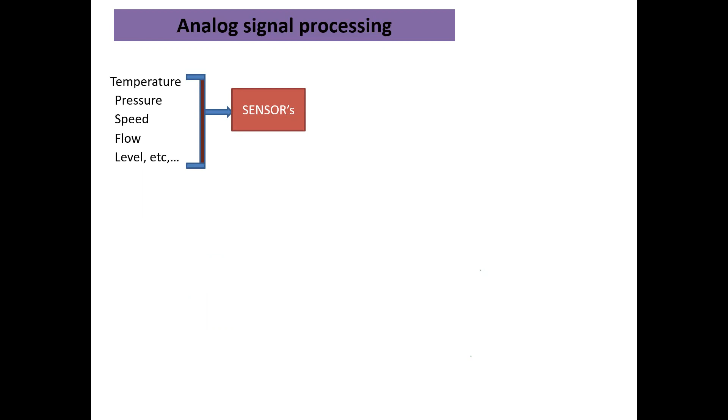So these parameters are measured in terms of non-electrical values. Okay, these are our non-electrical data, but our PLC requires electrical signal. So to convert this non-electrical to electrical, that we are doing using a transmitter or a transducer. Okay, which is giving you any one of the output here. Okay, two formats are available: voltage or current. Okay, but anyone you can use here, voltage or current.

So voltage is for shorter distances, whereas current can be used for longer distances. Okay, because there will be a voltage drop after few meters. Okay, like up to 30 to 40 meters, you can use a voltage signal, right? So after that, there will be a voltage drop. Okay, so to avoid that, we are using current signals for more distances.

Here you can see we are having some analog module. Okay, this is for the S7 300 controller. In that we are having this analog module, and in this module we are having some pins like 1 to 20. Here for your one signal, okay, for one channel you are having two wires. Okay, one is plus and minus. So like that we are having channel 0, channel 1, 2, 3, like this up to 7. Total 8 inputs, analog inputs you can connect in one module. Okay, in 300 system.

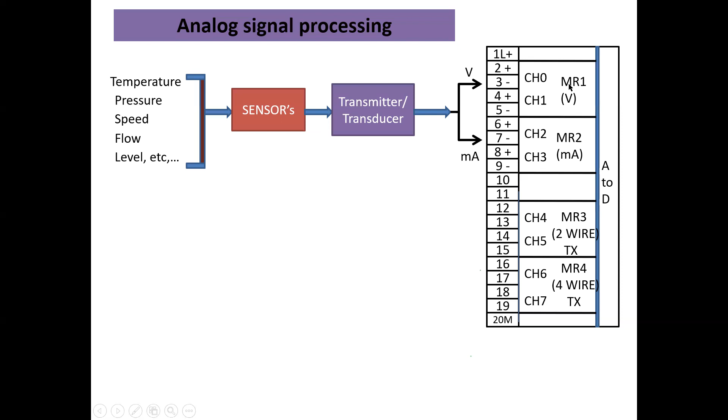Then you can see there is MR1. Okay, MR stands for measuring range. Here it is like selecting your type of signal, if you are using voltage signal or current signal. Okay, so this one MR is using two channels.

Okay, so one channel means one word, that is your one analog input, means it is storing some value. Okay, in your analog channel we are getting some value. So value means one word which is having 16 bits. For 16 bits, if you convert into integer number, you get some value. Okay, that is 240, 241, 243 in that format. That is one analog input. So one MR uses two channels, that is two analog inputs.

So this MR is like one jumper. Okay, this is actually one jumper here. At the side of the module, you will see there are some coding A, B, C, D. Okay, on this jumper, you can remove this jumper and you can connect. If you are selecting A, we are having this type of signals like RTD, thermocouple, or direct from thermocouple like 80 or 100 or 1000 millivolts, like that signals you can connect to the module.

If you are selecting B as a code, then that is ranging between minus 10 volts to plus 10 volts. If it is C, it's a 4-wire transmitter. D, 2-wire transmitter. The 2-wire transmitter means it is having only two wires, okay, which is connected to your channel, okay, plus and minus. So this transmitter is taking supply from your analog input module itself, and signal is also passing through the same two wires, okay, for shorter distances.

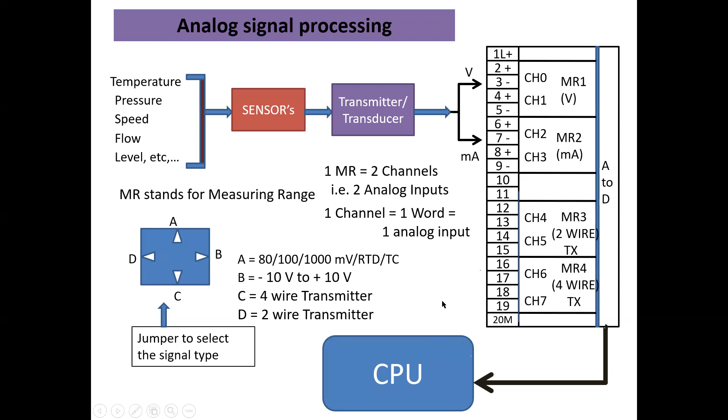So this is for 300. Nowadays for 1200 we are not getting this one. It is an input and output address format. For 300, PIW stands for peripheral input word, PQW for peripheral output word. So in our 1200 and in this TIA Portal, we are using IW as a format only. IW means input word. We are not using P here. Even for 400 series or 1500 series, we are using only IW as an input format for address.

And then we have to give a byte number. Here you can see 256 and 257. So 2 bytes means one word, right? So it is a word address for your analog inputs and outputs. So IW for inputs, QW for outputs.

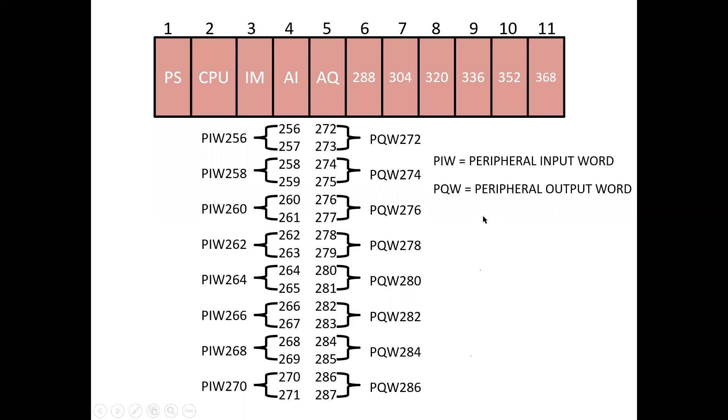So here, for example, if we are measuring 0 to 100 degrees centigrade, some temperature, that we need to convert. It is in degrees centigrade, right? So that we need to convert into electrical format. So this will be 0 to 10 volts. But your signal will not be exactly 10 volts. It might exceed also, right? There will be some fluctuation. Due to that, it can reach up to like 11.75 volts.

Similarly, current will not be exactly 4 to 20 milliamps. It might exceed also. It might go up to like 22 milliamps. So there's like an error, meaning exceeding the limit. So this is converted to 0 to 27648 in Siemens. For 0 to 10 volts or 4 to 20 milliamps, we are taking only 0 to 27648. The remaining range is called tolerance.

So they are using this remaining value for tolerance. 32767 is the maximum value. That's for tolerance, meaning how much it can bear at maximum. So that's why Siemens is taking only up to 27648 here. So this value we are getting in our input channel.

Input channel means IW, whatever the byte number it shows, like 80, 64. So on that channel we are getting this value, meaning this 0 to 100 degrees centigrade is converted to 0 to 27648, which is coming on your channel. But the actual value we are measuring is 0 to 100. That means we have to again convert this 0 to 27648 to 0 to 100. That is our engineering units.

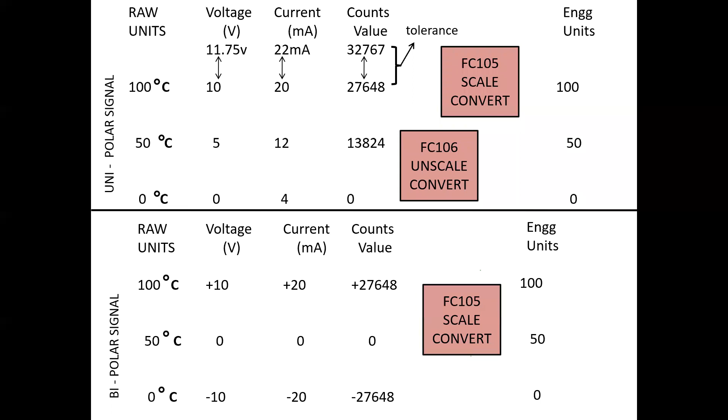So this is about scaling, what we are doing in scaling. For unscaling we use FC 106 in 300, called unscale convert. But in 1200 we have a single block which you can use for both scaling and unscaling. For that they use a separate concept in 1200 called normalize. One more block is provided called normalize, and using that block we convert the value. We will see the example.

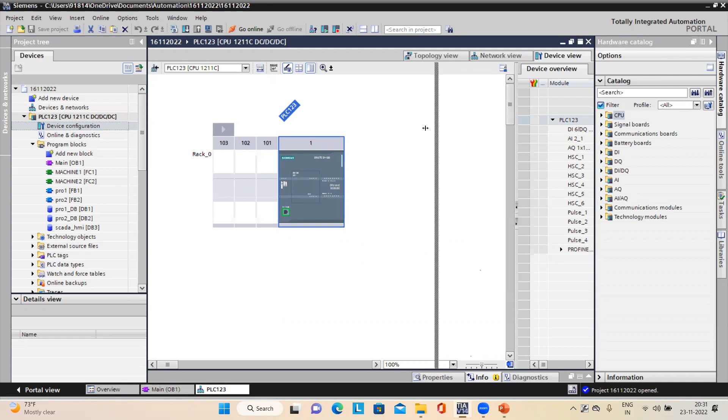Here in the program, if I go to the device configuration, there is your hardware configuration. Here you can see in your CPU you have two analog inputs, AI2. It is showing the analog input address starting from 64 onwards. 64 up to 67: 64, 65, 66, 67. These are the byte numbers. It has two analog inputs, meaning two channels only, and one channel means one word. So the word addresses are IW64 and IW66. Similarly, we have analog output.

If you want to see, you can check in the properties for the analog module. Select the CPU, go to general properties. Here you can see AI2 analog inputs, and you can select the range here. Go down: there are two channels, channel 0 and channel 1. For these, the voltage range is already fixed at 0 to 10 volts only, for the second channel also. For analog outputs, you can see them here, and whatever output you want, voltage or current, you can select here.

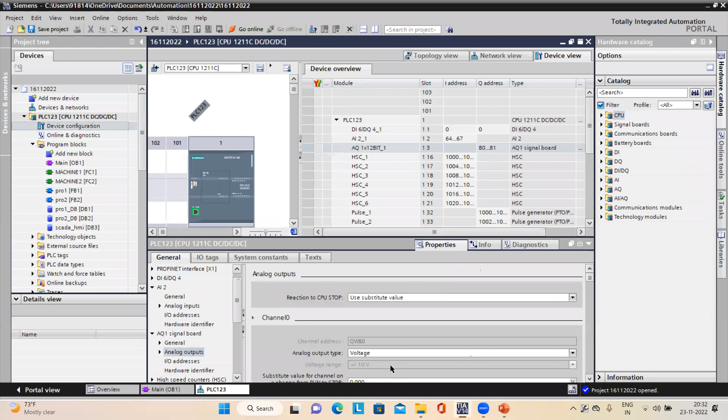For current we'll get 0 to 20 milliamps as the output, and for voltage we'll get -10 to +10 volts, that you can get here. The signal is already fixed here with this compact module. Now I save this for programming.

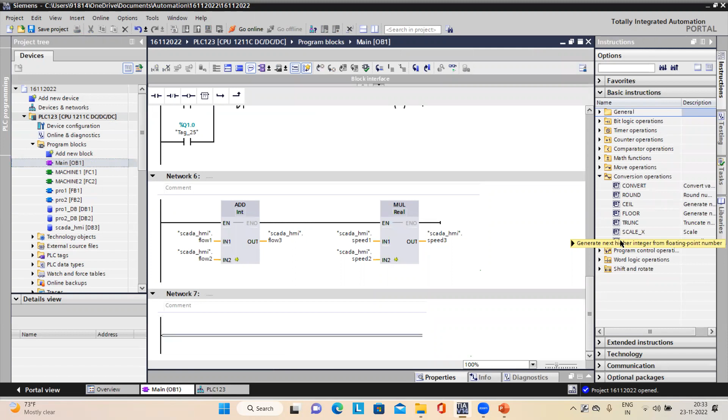Here, first of all, you go to the conversion operations. Here you can see we have NORM_X and SCALE_X. So first we have to normalize. That means whatever we are scaling, we are getting an integer value, whose minimum is 0 and maximum is 27648. That's the input we are getting.

As we cannot access the I address here, I'm using some word memory like MW50. Consider this as an input like IW50 or 64, whatever it is. I'll do one thing, I'll take MW64, because instead of I I am using M, as we are doing it with the simulator. Then your output will be in real format. Here we'll get MD60. I will get the output.

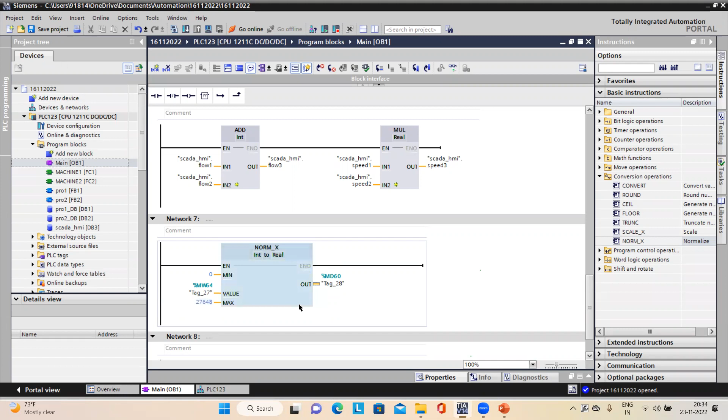So what it is doing here, it is converting 0 to 27648 to 0.0 to 1.0 in real format, integer to real. So for 27648 we'll get 1.0. Then we are scaling this value again from real to real only.

MD. Where is it? This is EN. EN means enable input. This is MD. Here MW. MW means word address, MD means double word address. I think you have not revised that addressing. I showed you bit memory addressing, MW, MD. So please revise that addressing. You can use the bits in byte, word, and double word addresses.

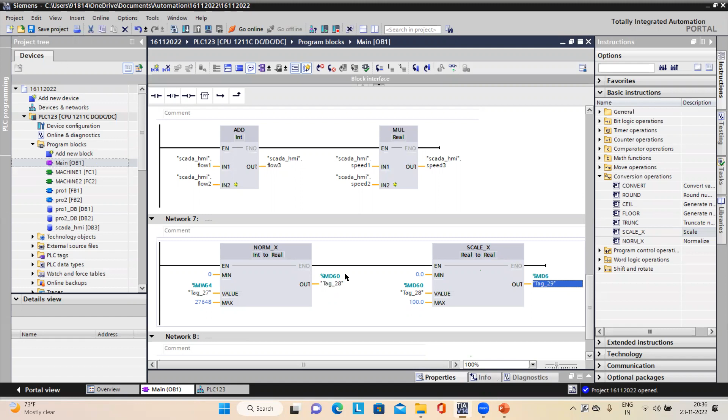So here you can use this MD60 as an input for the scale block. Then here we'll give the range. What is the minimum value you want to convert? 0 to 100, that is 0.0 to 100.0. This range you will get in some MD. So MD70 will get the converted value. So I save this and start your simulator.

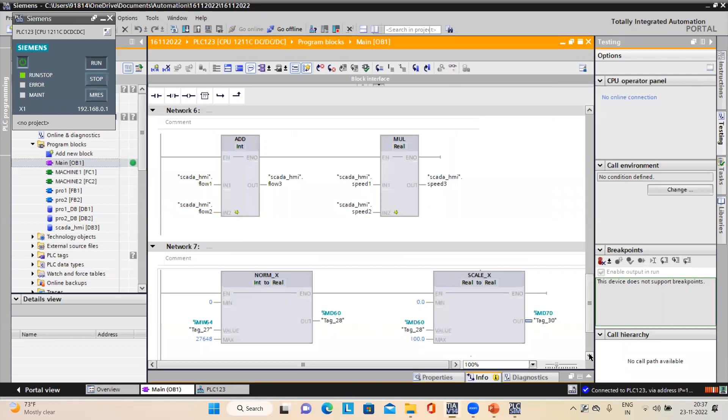Here, go online. Now for the input, your value should be between 0 and 27648. So I select here, right click, modify operand, and give some value like 10,000. For 10,000, I'm getting 0.36. This 0.36 is again converted to between 0.0 and 100.0, so it is multiplied by 100 here.

You are getting 36.16 here. So if I change this again up to 27648, the maximum value, it's 1.0, and for 1.0 you are getting 100.0. So here we are normalizing our 0 to 27648 between 0.0 and 1.0 only; it will not exceed 1.0. Then that 0.0 to 1.0 we are converting to 0.0 to 100.0, and that result comes to your output here.

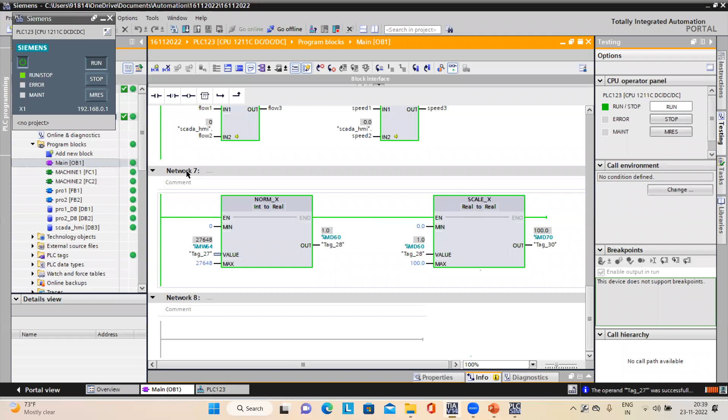Similarly, we have to do unscale. I'll just copy, Control C, Control V. For the same input I'm using MD70, which is your real input. For this, you have to convert 0 to 100.0, and you get it in MD80. This MD80 I'm taking here as the input, which we have to convert into an integer.

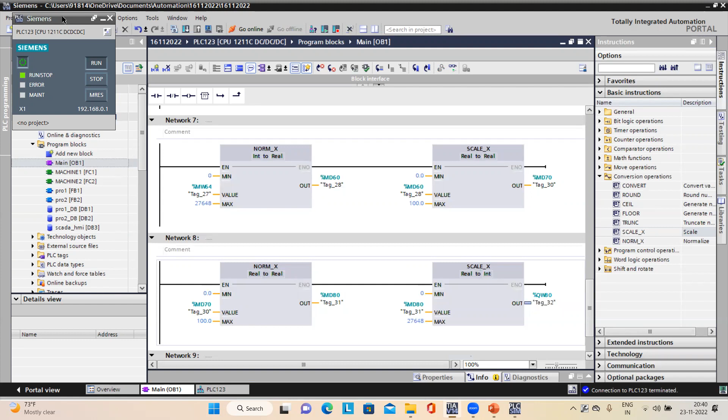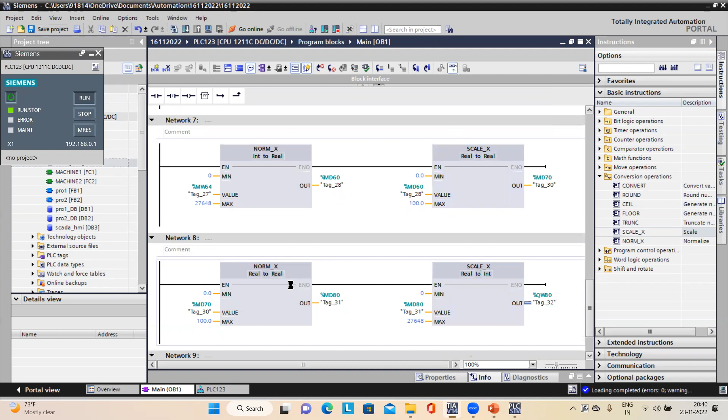So your integer range should be 0 to 27648, and your output will be an output address like QW80. We have that address there, and it will be converted. So edit, download. This will go directly to your output module; after the conversion, the result goes to the output module directly. Here you can see the input is 27648, and at the output it is showing 27648.

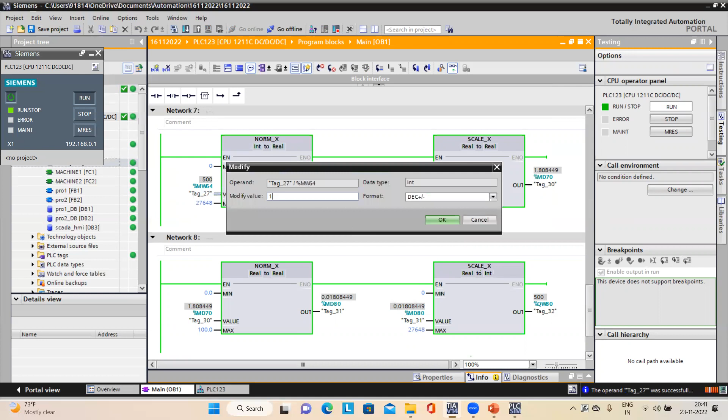So whatever the input is changed to here, like 500 something, we'll get the same output. At the output, this value of 0 to 27648 is again converted to 0 to 10 volts or 4 to 20 milliamps. So this is what we are doing in scaling.